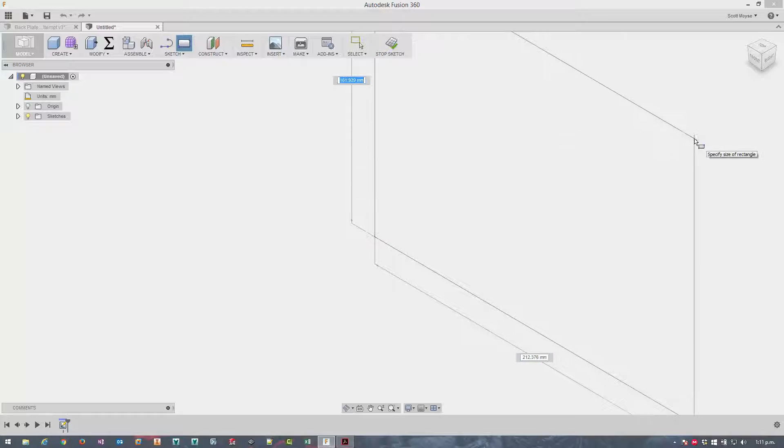In Fusion, you start drawing something up, let's call it 500 by 600, and we extrude it out 10mm, and we start needing to position some holes.

Seems pretty straightforward, so you can access the hole command from down here or press H, and it's going to ask you a couple of options: at point, so you can create one hole at a time, or multiple holes based on a sketch. Let's just do the first one, and we want it to be 20mm diameter.

Just hit enter there. So that was at some random position. Let's edit that and select some references. We want that to be 90mm away from that edge and 120 away from that edge.

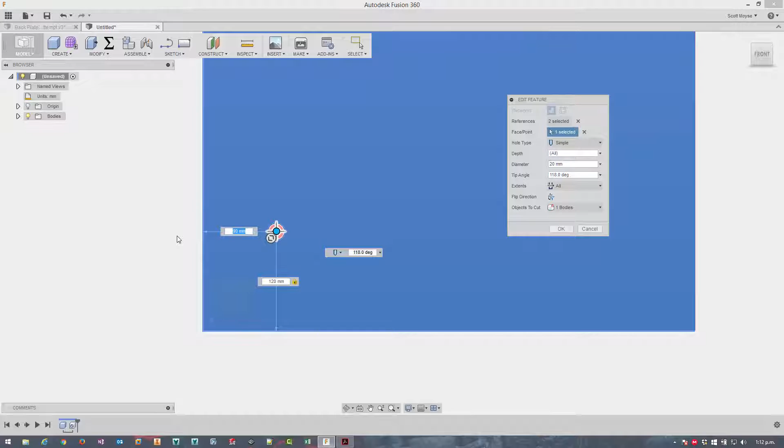That's fine, that's cool, but there's going to be a whole lot of hole features all the way along here, and not all the dimensions you've been given are from the edge. Sometimes they're offset from that, so you'd have to create a formula, add that to that.

As an example, we could create another hole again. Let's repeat the command and go from that face there, this edge, 90 plus 40, and then from that edge again, 120. So that's cool.

They're in alignment with each other because we've typed in that dimension, but what happens if the dimension changes? You've got to go through and reposition the hole on each one of those holes. So it's really kind of clunky, not the best situation.

So let's just roll this right the way back and delete that. Now how about a different approach? Let's create a sketch. We've got a PDF, so why not use it?

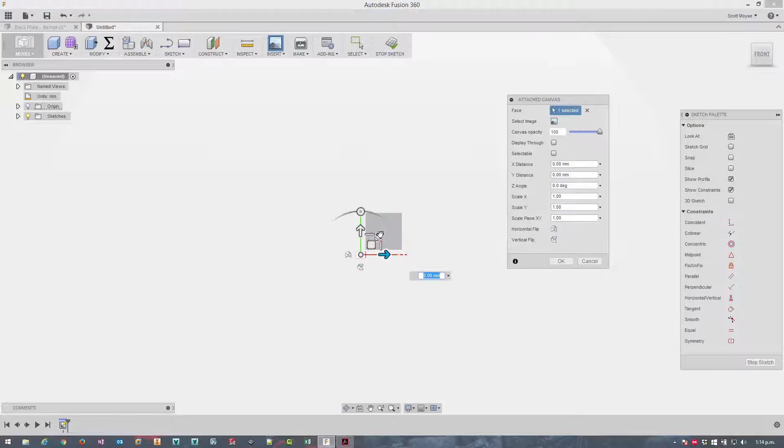So I took a screenshot of it so I can create and attach it to the canvas, and scale it up just a bit, but we'll deal with getting it to the right size in a second.

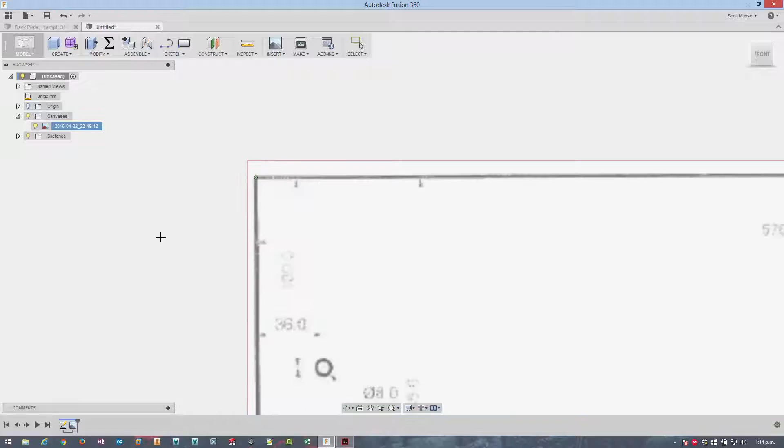Once that's into the document, we see that we get a canvases folder added to our browser, and this particular image has been added. If we right click on that and select calibrate, we have the opportunity to pick 2 points, and the further away those points are from one another, the more accurate it's going to be.

So between these 2 points here, the length is 1214mm. So now the whole image has been scaled roughly to that size.

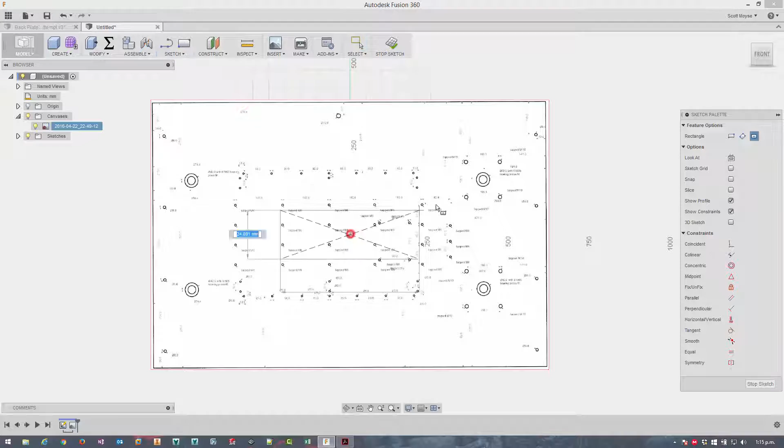If we draw a center point rectangle, from there out we know that it's 1214 wide. If we press tab, we can go back to the other dimension and type in 800 and then enter twice, and we end up with our rectangle. How well does it align? It's pretty close. Alright, so that's pretty sweet.

So how are we going to draw all these lines? Well, we can take advantage of that second option I mentioned before, where we can select a whole bunch of points from a sketch.

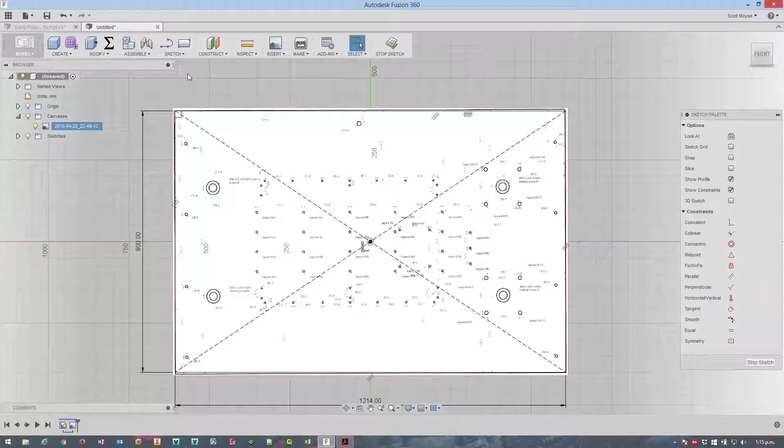Let's create a whole bunch of points. I'm going to add this to my ribbon just so I can keep coming back to it. I can place a couple of points, but are they really aligned? No, they're not.

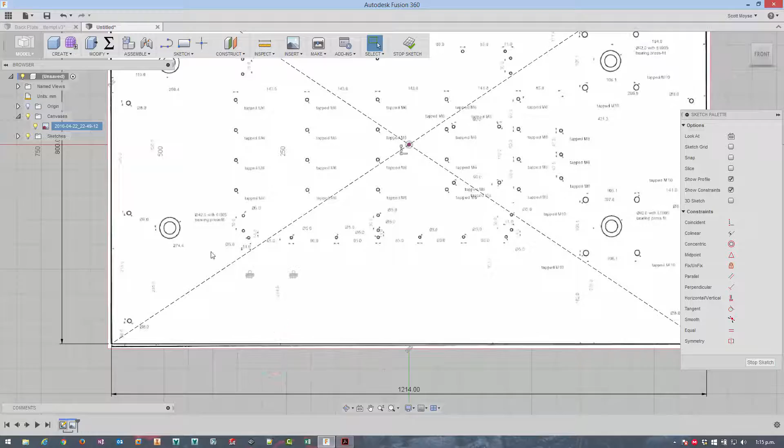So how do I align those two so they stay horizontal? I have to hold down the control button on my keyboard, right click and select horizontal vertical. But I can't select a whole bunch of them at the same time to do that, I have to do them one at a time. So that's not going to be ideal either, that's far too much clicking.

So let's undo those points and take advantage of this particular canvas that we've created. So can we see any trends here? We've got a rectangle, we've got some lines here.

There's a rectangular pattern in the middle with another rectangle in here, an oddball set of 3 holes which are in line with one another, and another rectangle here. Looks like it's mirrored over this side. Right, so let's start drawing some lines, can start roughly from here across to here.

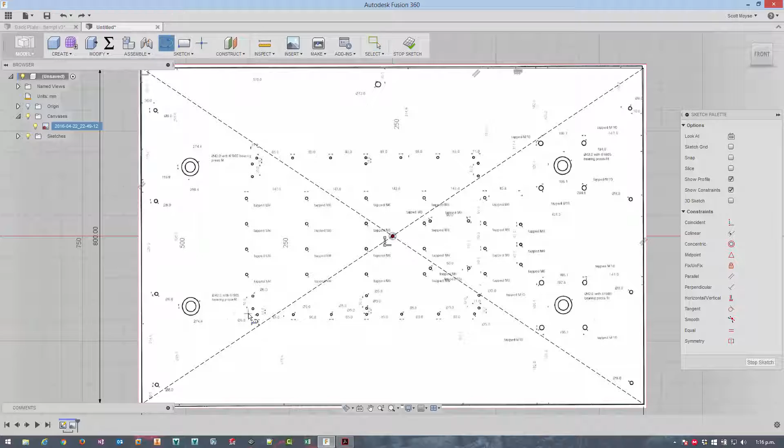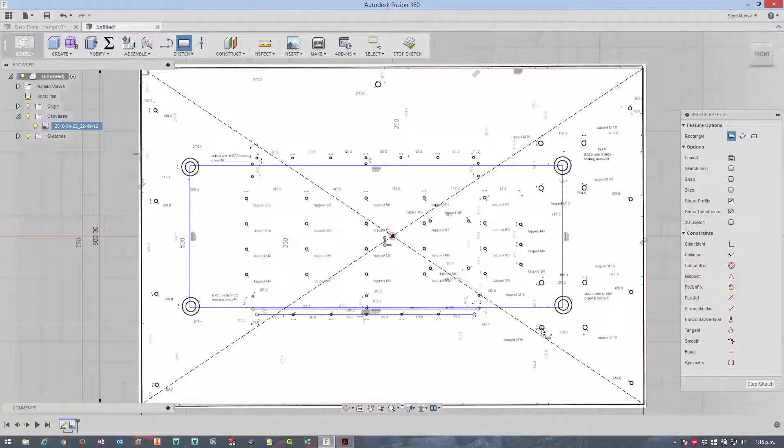Repeat command and draw from here across to here. Alright, that's all good. And now let's do a rectangle. So half a rectangle, center point here across to there, and we want to do another one from here to here. And we'll grab this rectangle in here.

Let's go back to press L for line and draw this line. And we're going to do these two lines out here as well, so repeat command. We'll draw a line from this kind of overall rectangle straight the way through to the other side. And do the same thing on this side. Now these are actually, there's 36mm on this side and 30mm on this side, so we can't mirror that, okay?

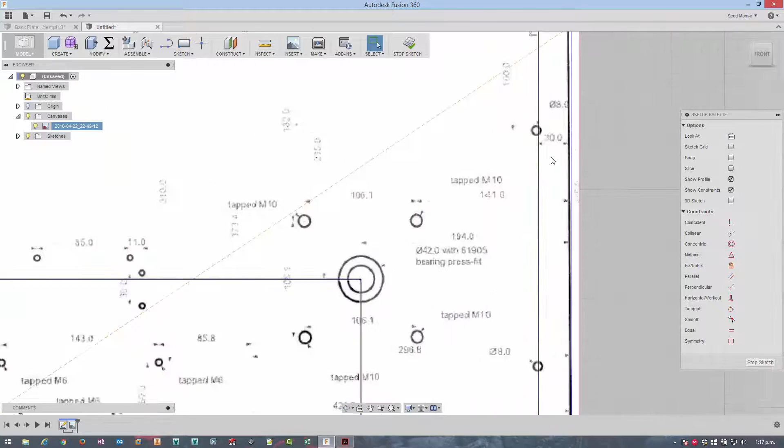Alright, so they're all individual lines, which is fine, but they are lines which end up being calculated for profile. So when we extrude this, we're going to have to select each individual profile here, so we don't really want to do that. You can see these profiles here now quite clearly. So let's highlight all of these and press X to turn them to construction lines.

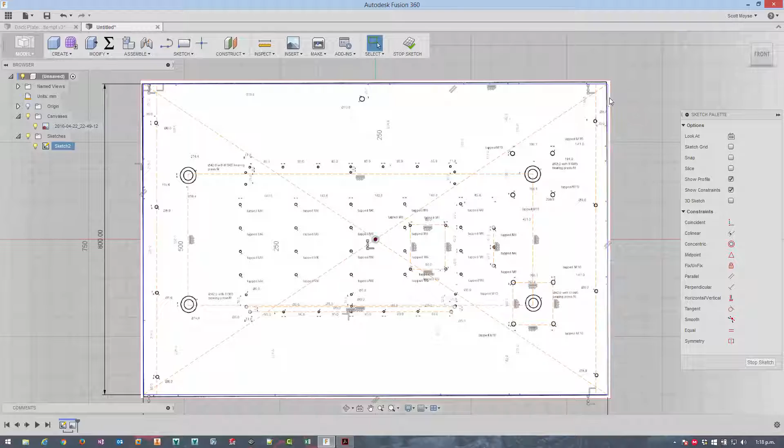Okay, X, X, and X, leaving only the outside as a normal line. Okay. The other option there is to highlight that and just switch between normal and construction by clicking this option here. Alright, so we've got all of our construction lines laid out. Now we need to start placing some points.

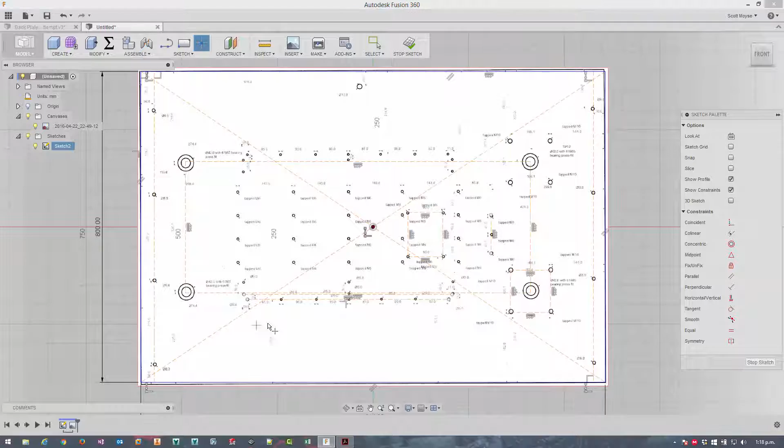Now when we enact the hole command, endpoints of lines are treated as points. So we don't need to place points at those locations. So now we can start placing them. And notice here that I'm automatically snapping to that line. So by placing the next one, it's going to make sure that they are horizontal and in alignment with one another. We do need to place some additional holes in here.

Now, I know that this, by looking at this, 85, 90, 85, 85, 90, 85, so we can snap to the midpoint of that line. Alright, so the little triangle icon came up indicating that. Then we need 2 more points here. This line here is 11 mils away from that, and on this side 11 mils away from that. So again, we can snap to the midpoint, and we don't need points on either end of the line here.

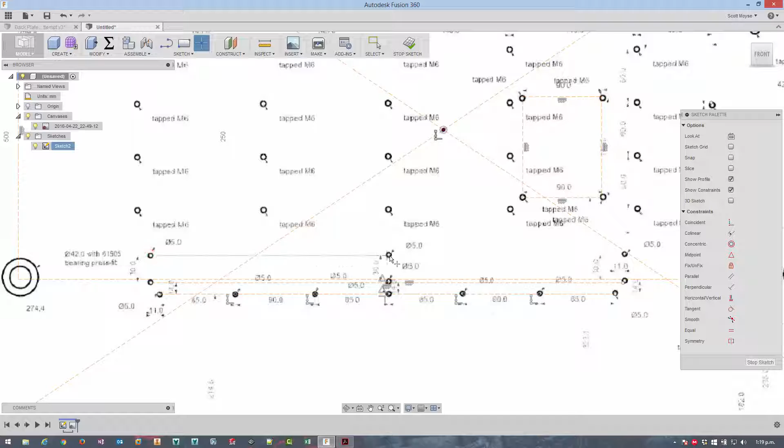These are kind of independent points, so we could pattern them, but just so I can show you the workflow, I'm going to place them manually. I don't need to place any points on here, nor on this rectangle, nor on this rectangle. I don't need any points at either end of this, but I can put one in the middle because we've got 47.5 mils either side, so it's definitely in the midpoint of that line.

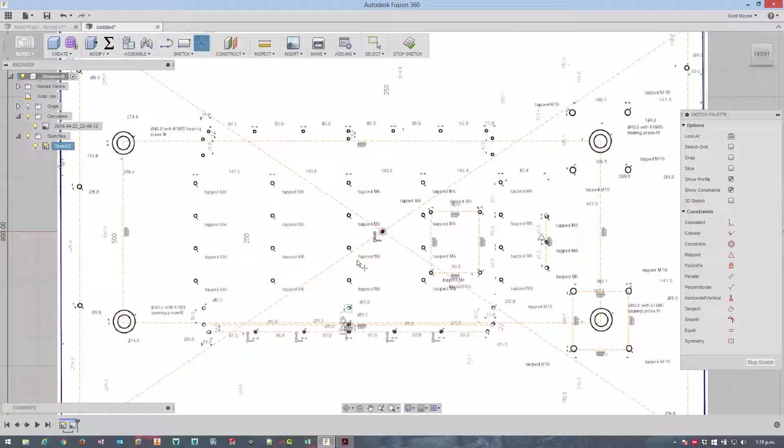All of these holes here are going to be mirror image of this side, but we're just not going to select this particular hole because it doesn't exist on this side. And then all of these holes in the middle here are a pattern. I could pattern them from the bottom left corner across, but this particular hole is in alignment here, alright, with this one. So I'm going to place a sketch point there, and we need to do all these sketch points up the side here.

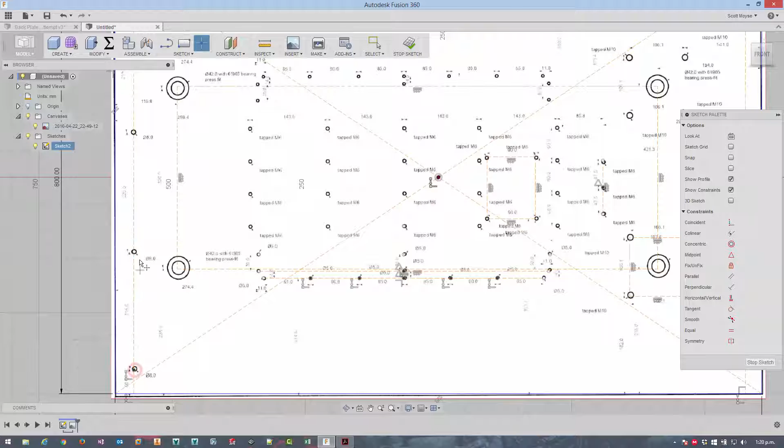So again, I'm snapping to the line to make sure they remain aligned at all times, and then the same thing over here. But how about this for a different method? Instead of placing individual points there, let's undo that. So Control Z. We know that the endpoints of lines are treated as points. So let's make it easier on ourselves for constraining and just draw between these.

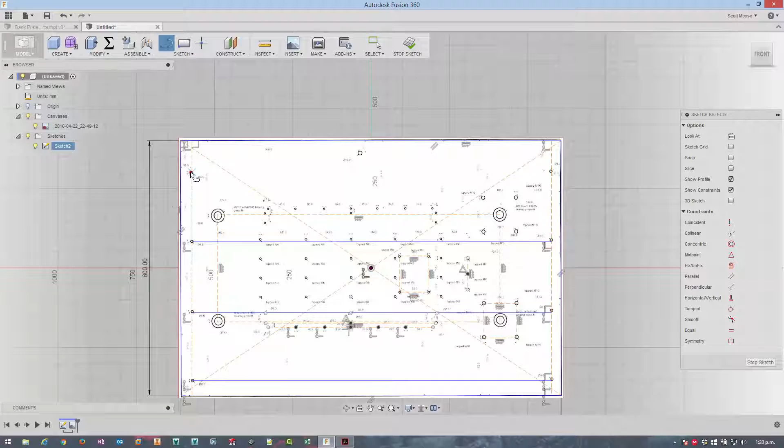So we can dimension once and only have to deal with one constraint. I'm going to leave them as normal lines because if they're construction, then I'm not going to be able to select the points. So D for dimension between that line here and the edge of the original rectangle we sketched out, and that's 50 mil. So that's it.

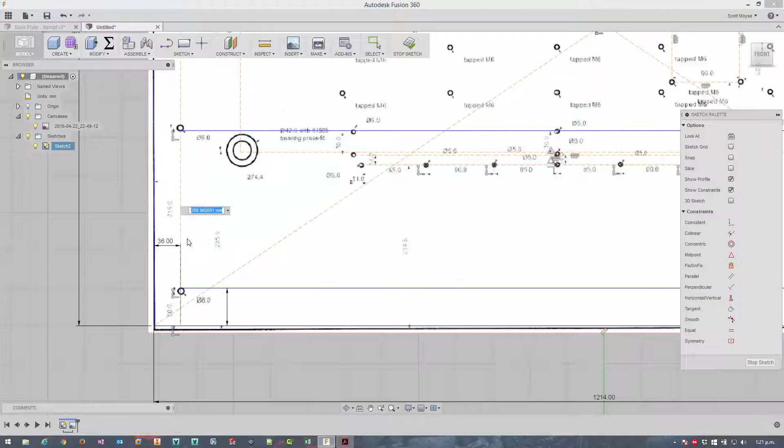This edge, this line, and this one here we've already discussed is 36 mils. This line, this set of row holes is 215 mils away from the previous set. These ones are 220. And then the last ones are 215 again. And so you can kind of see they're all falling roughly in the right place in regard to the image behind it.

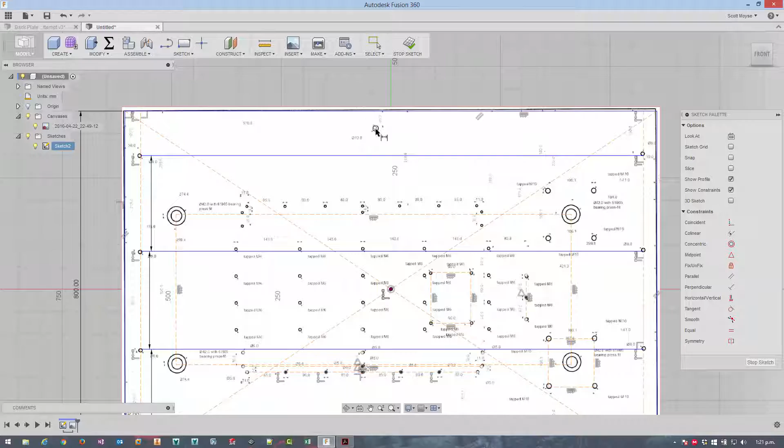Just one last point is this one here before I forget it, and we may as well dimension this while we're here. So I pressed escape to exit the command, then D to execute the dimension command, and this is 40.7 millimeters away from the edge, the top edge of the rectangle, and 576 away from that side of the rectangle.

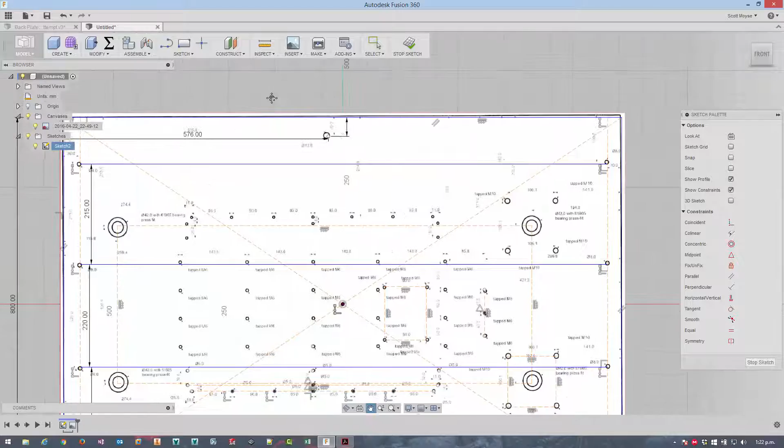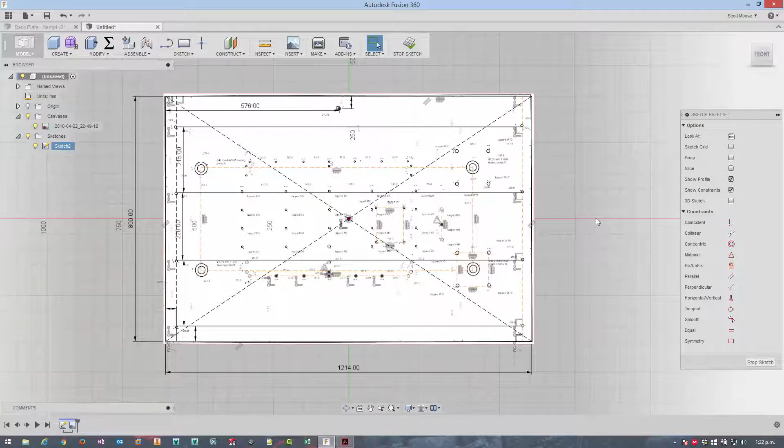Notice that these lines are blue at the moment because, although I've constrained it about the center, these are free to rotate around, so I'm just going to highlight both of those and then use the fix/unfix. Now you can see everything's turned black, which is all hunky-dory. It's exactly what we want. We don't want this stuff floating around all over the place willy-nilly. Right, so we actually need to dimension this side here to tie that down, so that's 30 mils. And so that's all of our holes positioned down the side now.

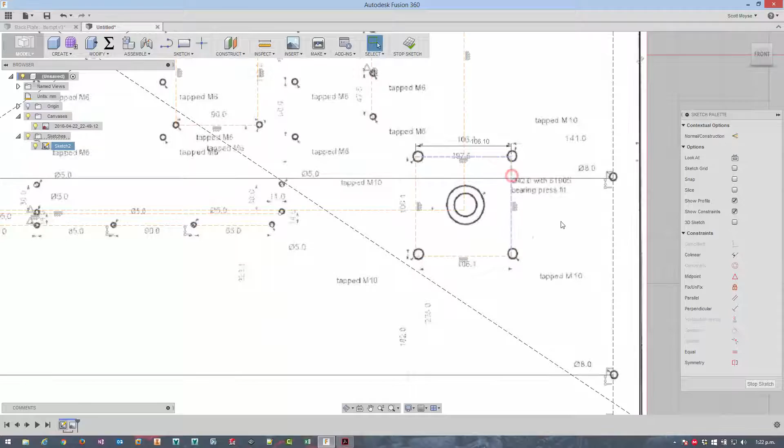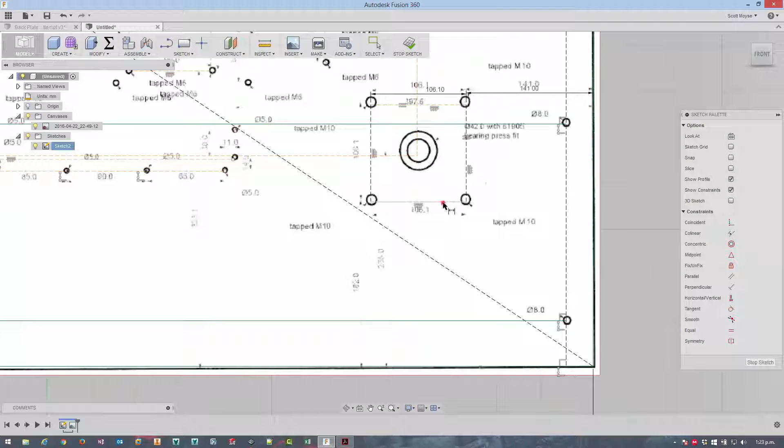Now we can start tying this lot up. So this is 106.1 mils square. Alright, so let's highlight those two edges and make them equal to one another. Now we need to tie down the location of that whole rectangle, right? So D for dimension again. Dimension from that edge, it's 141. And then from here to the bottom edge of the rectangle, it's 182.

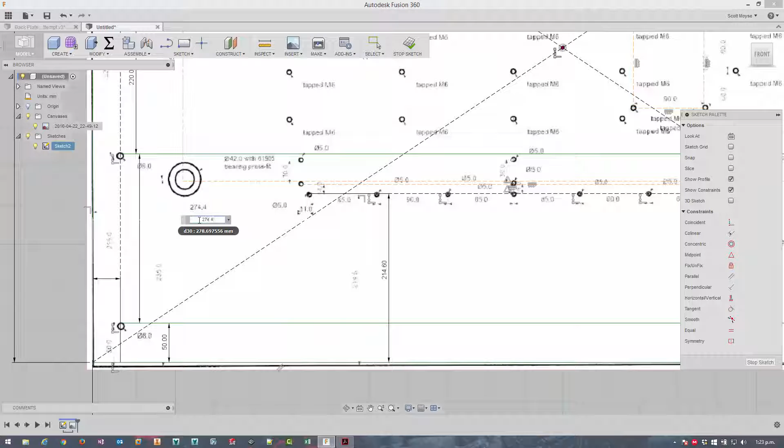Okay, so how about this bottom line here? We'll just start working our way up, right? This is 214.6, and the end point is 274.4 mils away. And the overall length of the line is 85 plus 85 plus 90, then we times that by 2. So let's do some formulas here. So we'll add some brackets to make sure that that all gets calculated first, go to the end and then multiply it by 2.

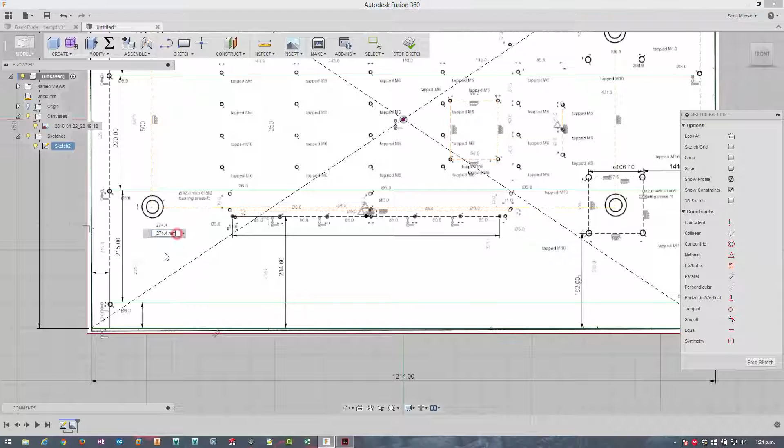The use of the PDF underlay here has been quite handy because I've just noticed that one of these dimensions is wrong, and I wouldn't have noticed it if I didn't have the PDF behind this sketch. So actually this is 274.4 plus 11 mils, and then we dimension from that point there to this point here as that 11 mils. Okay, so that's tied down that line, and we're talking 14 mils away from each other here.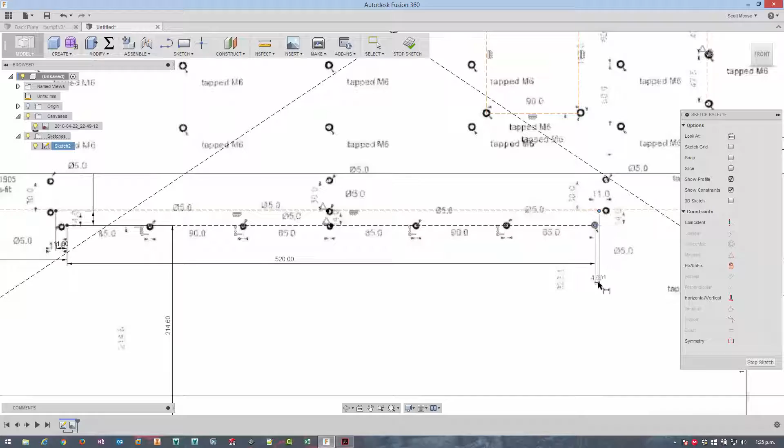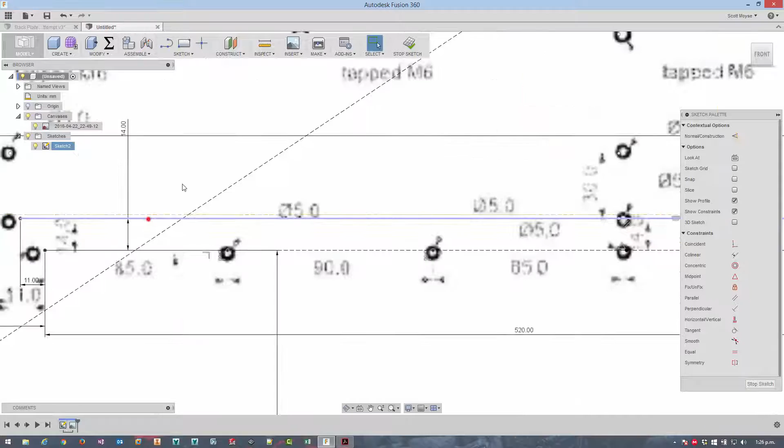And we want to tie down this end as well, and that's also, oh no, okay, what's going on here then? So why has that been locked down? Let's just delete this line a second and draw that one out again. Alright, so that's all fully constrained now.

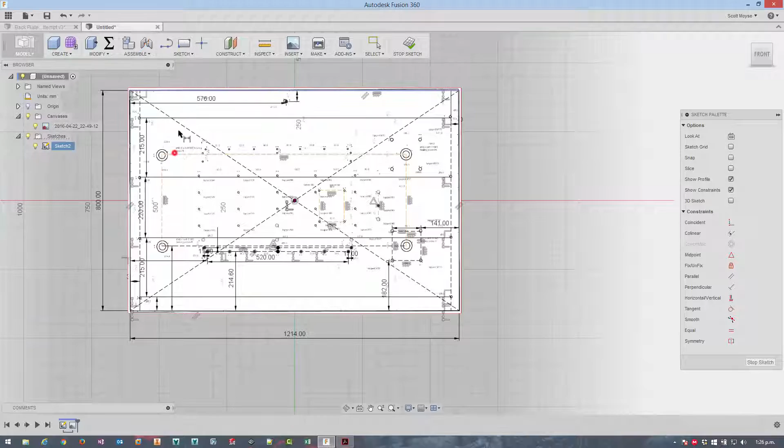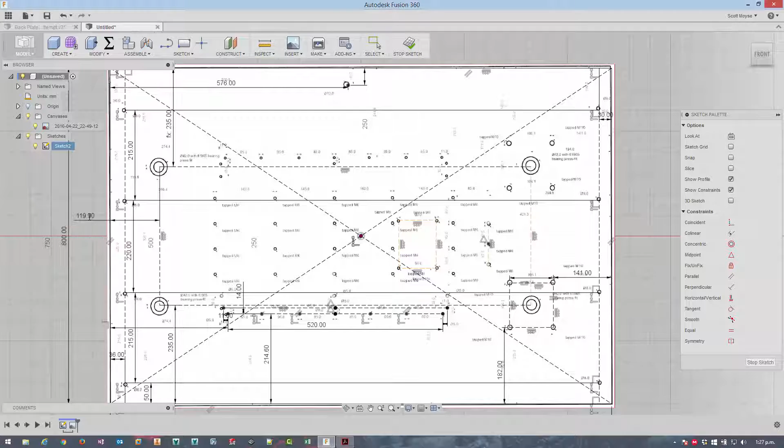So how about this rectangle? So from there to the edge is 235. It's the same dimension on the top as well. 235. I could also make this equal to this. So if I change this one, you can see the FX lettering at the front indicates that it's equal to another dimension, and that's this particular one over here. Now how far away is this from the edge of the rectangle? 119.9. And what about this side? 194.

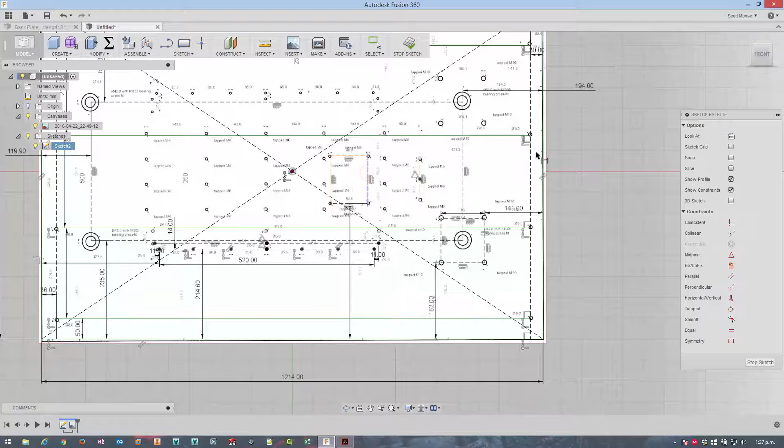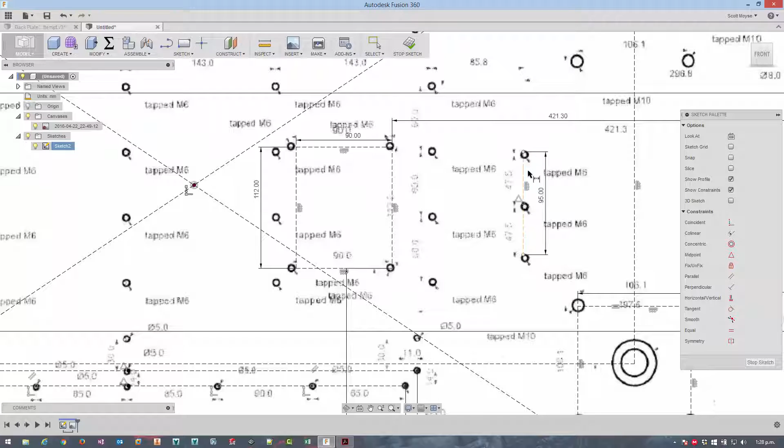Okay, right, the last couple of construction lines to dimension: this one here is 323.1, from this side across, 421.3. This is 90 mils, 112. This one is 47.5 times 2, 95 mils. And I just need to lock down the position of that to the side of the rectangle, 296.8, and then the position of the line from the top of the rectangle is 373.4.

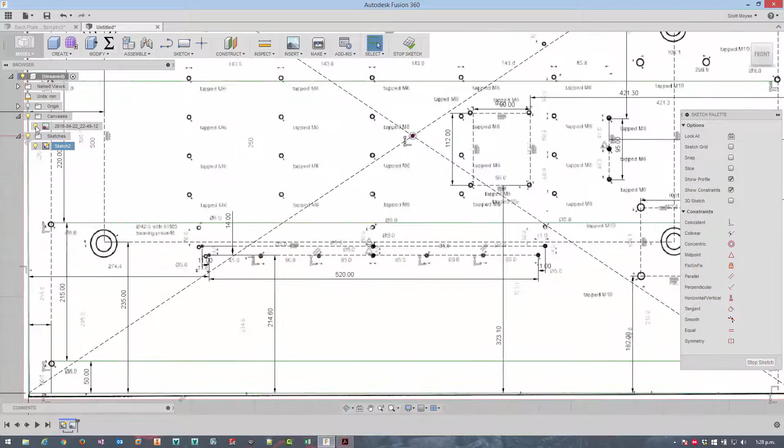Alright, so let's turn this canvas off a second and have a look and see what we've got. We need to turn on the horizontal/vertical constraint, so that is vertically constrained to that. These two are vertically constrained, and then these are horizontally constrained to one another. Now they're just free to move up and down, and I know that they are 30 mils, so D for dimension from that line 30 mils away.

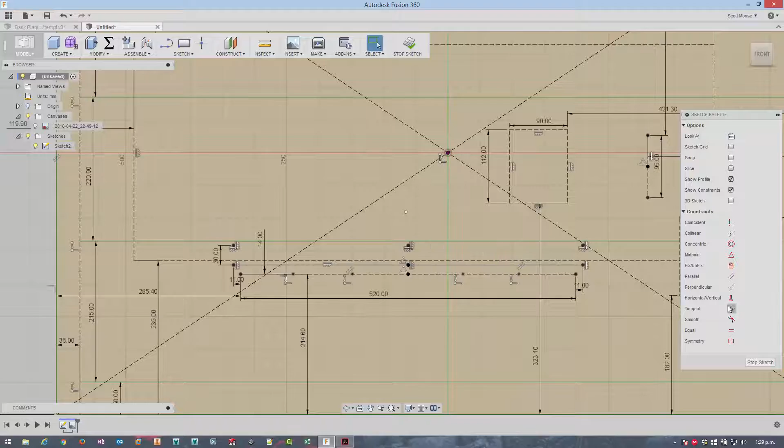And if we execute that horizontal/vertical constraint again and make that vertically constrained to this point here and dimension this point from the top edge of the rectangle, it's 310 plus 60 plus 60 plus 60, because we've got 4 rows with 3 gaps. Alright, so let's do some patterning. Do a rectangular pattern.

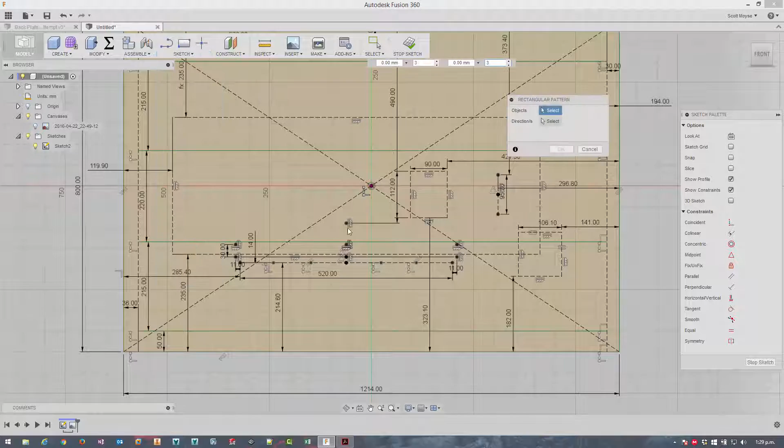Going to pattern that object. We need to make sure it's the spaces in between. This horizontally is going to be symmetrical, and we want a total of 5 holes in a row with an offset of 143. We can turn off individual instances if we want, just by deselecting this checkbox here, so it will miss out this hole and place this one over here, which is pretty handy. But we do want that one on there.

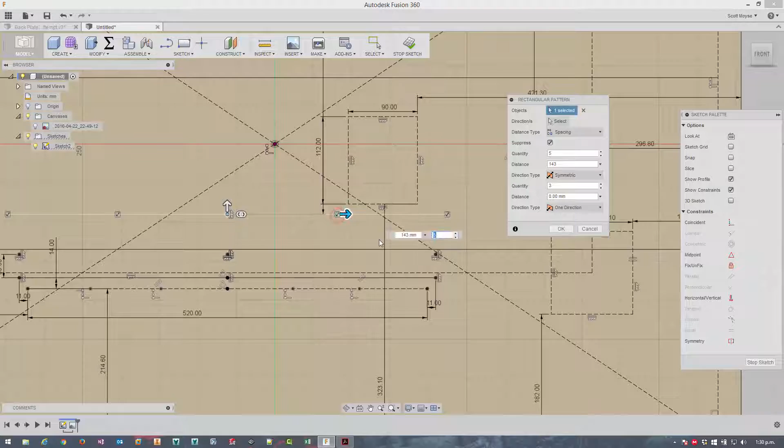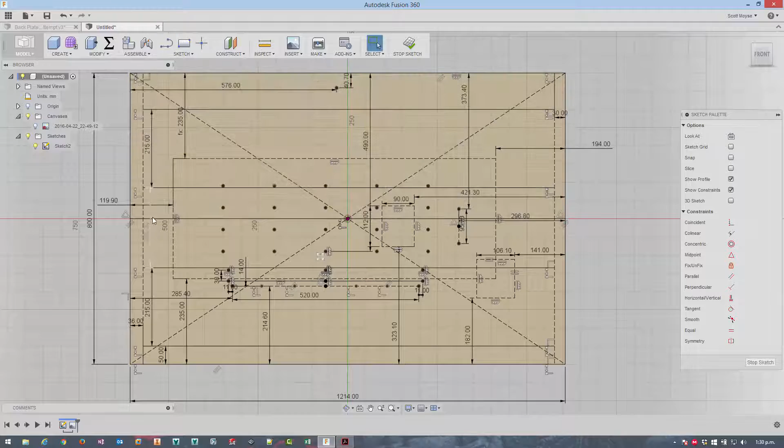Then in the other direction we want a total number of 4 holes with an offset of 60, and that's the lot. Okay. Alright, so we did have a whole bunch of holes over the other side here as well, so we do need to mirror those, right? So L for line will snap to the midpoint of this rectangular edge over to this side, highlight the line and make it construction, and we'll execute the sketch mirror command,

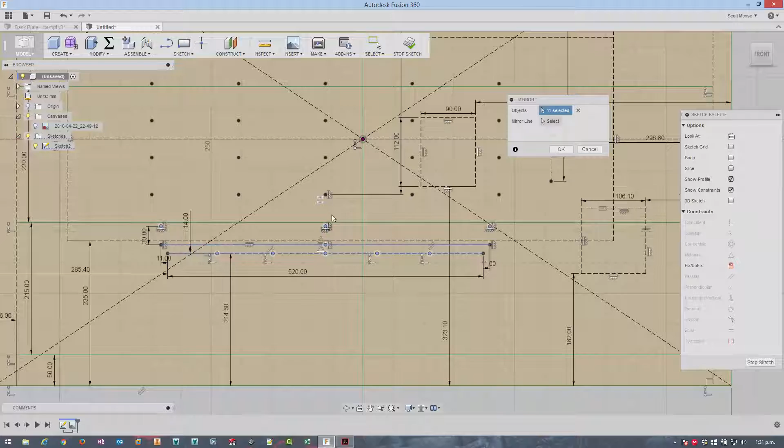and we want this line, these 2 holes, this line, actually we need to add both of those, that point, and also this point here. Actually, just remember we need to get rid of this one, so hold down control on the keyboard and then click that to deselect it, and we need this to be mirrored over the other side as well, and that's the lot. So we just need to select the mirror line, everything's mirrored over this side, and we're ready to go.

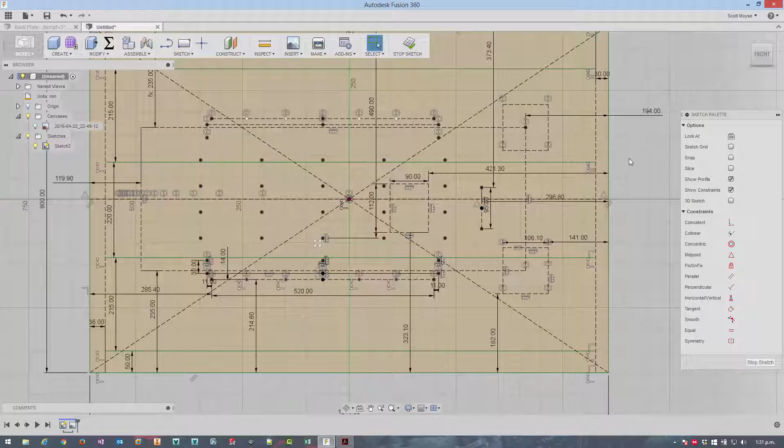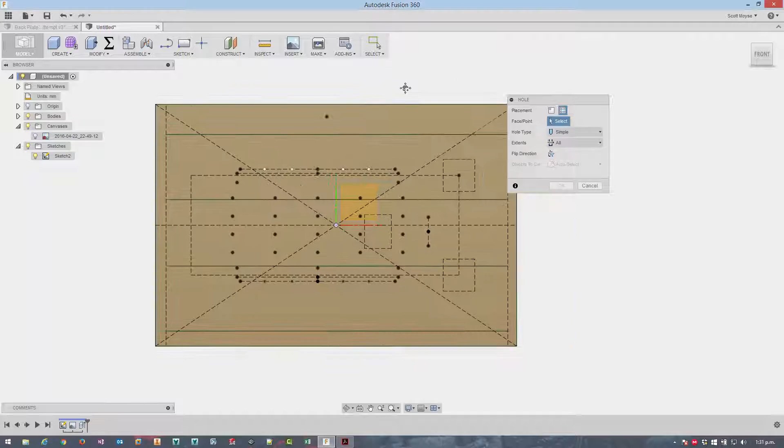Alright, so how about actually placing some of these holes now? So we finished this sketch, we need to come back and press E to extrude this, and we'll extrude it away from the screen minus 10 millimeters. We have to turn this sketch back on because we need to reuse it now, right? And then press H for hole, and we'll start with all the tapped M6 holes in the middle. So we're going to select from sketch, and we can window select over all of these lines and points.

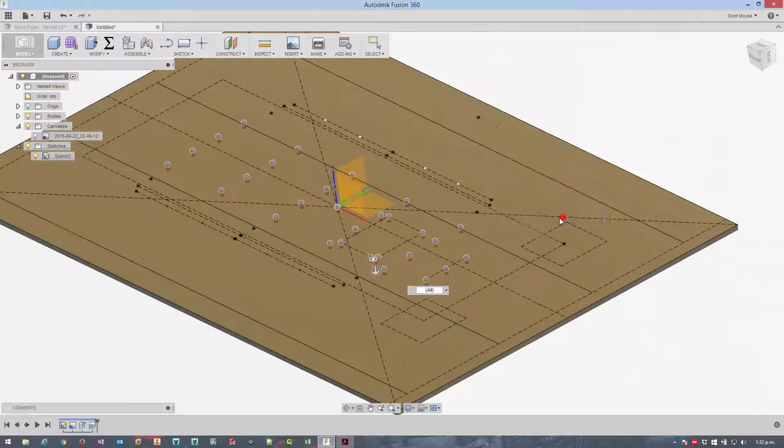Every single one of those are tapped M6, so we need the diameter to do 6, extents all, so it's going through the whole thing, right? So we orbit this around, you can see it's breaking through, and that's it. So we click OK, and just to keep track of things, if you right click on the feature and rename it, we'll go tapped M6, enter. Alright, so that's those holes done.

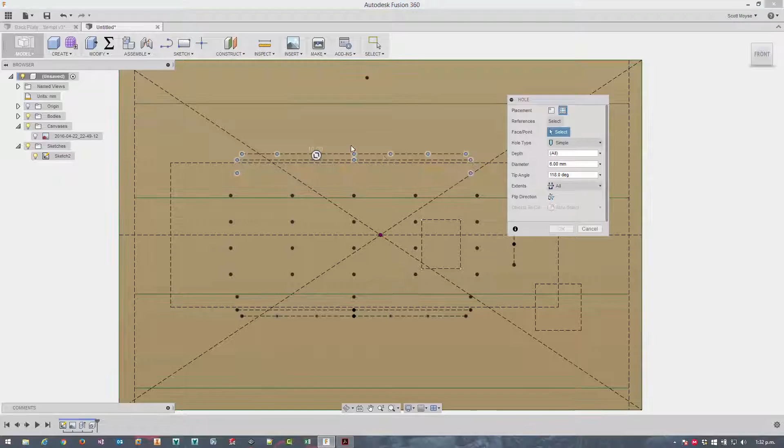We'll look at the top of the part again, and press H for the next set of holes. So these are all 5mm diameter holes, and the same here as well. So with depth through all, diameter 5, just check that they're all going through, and they are. Click OK, and we're done. So those holes are done. Right click, look at the top again, press H for hole.

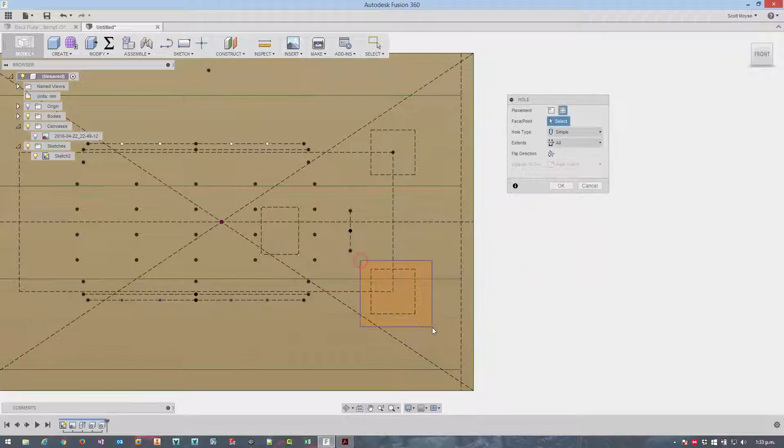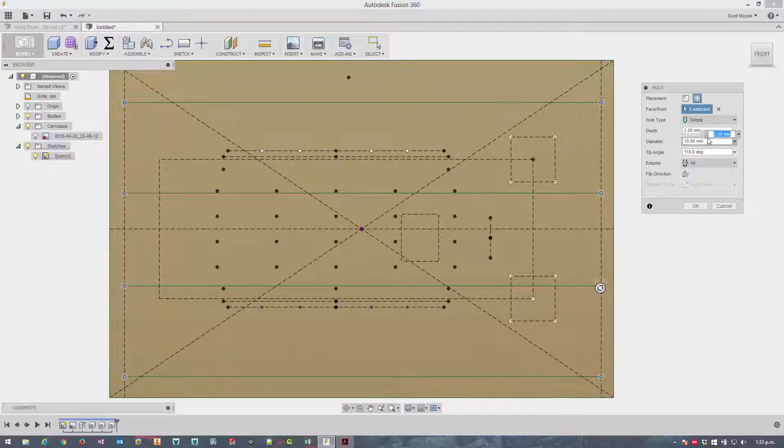This time we're going to do these tapped M8s, no, tapped M10s, 10 mils, going all the way through. OK, right click, rename, enter, and we need to do these holes down the side here. So H for hole, we'll window select over the endpoints here, and these endpoints here, and these are just 8mm through holes.

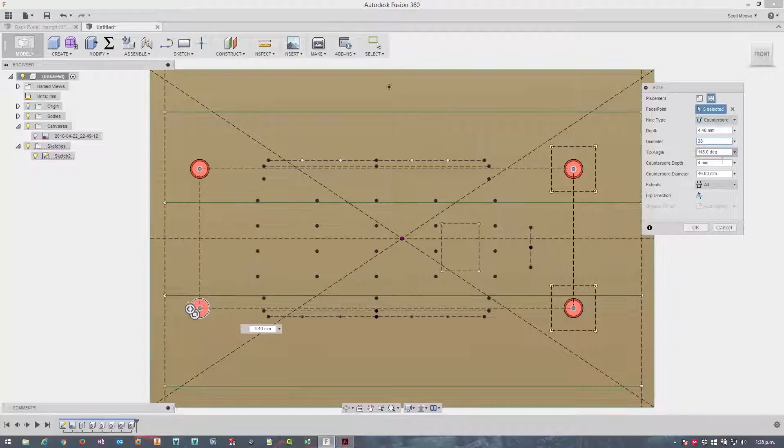So H again, select that one hole, set it as 12. Okay. And then H again. This time we're going to select those two holes, these two holes, and we're changing to a counterbore this time. Right, so the counterbore depth, let's just call it 4 mil. The diameter here is 42. No, we'll go with 38 and then 46 on the counterbore diameter. That's it. Okay. We turn that sketch off.

We've now got all of the holes we needed in that plate, and it's all parametric, so we can go back into that sketch at any point and edit the patterns or edit the overall sizes of the rectangles and their positions, and everything will just update. You know, that was a reasonable number of holes, fairly complex sketch to dimension and layout, but we've now got a fully parametric model with all of the holes in it for this fixture plate in around 20 minutes.

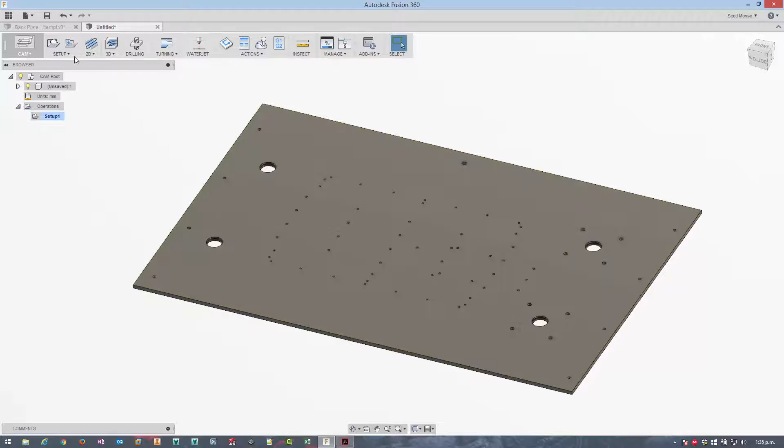Now you can step into the CAM environment, create a setup, and let's say drill, we can go with a 5.2 mil drill in this hole, select same diameter, and it's going to go through and find all of those holes and machine them in order.

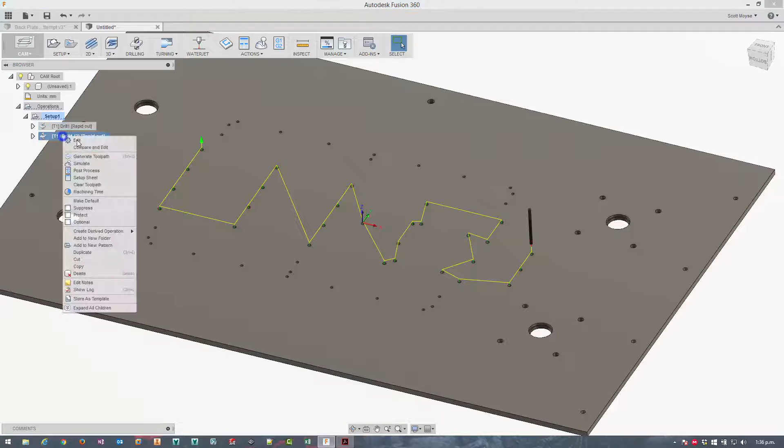Then we could right click, duplicate, edit this, switch to a tap, and go with an M6 tap, and now we're tapping all those holes as well.